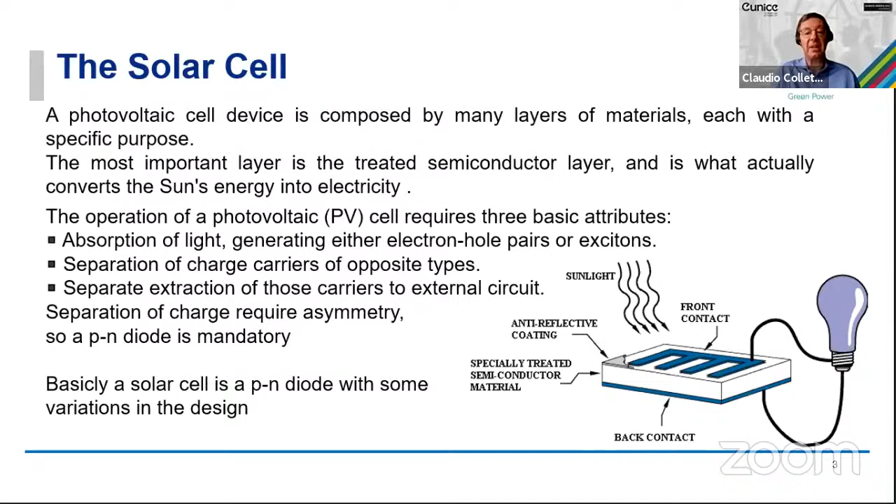Basically, a solar cell is a diode, a PN diode, with some special design that allows us to perform this kind of extraction. We have different kinds of solar cells.

The most diffused in the world is the monocrystalline one, in which the main base is a crystalline silicon wafer that functions as an electrical generator, and which we process, adding some coating and passivation layers that act in the phase to extract these charges.

There are many other kinds of solar cells, as you can see in this picture, such as some thin film, which could be a silicon-based amorphous film, or other different kinds of films like CIGS, in which we can have different materials than silicon, such as complexes of indium, gallium, selenide, cadmium, tellurides, and so on.

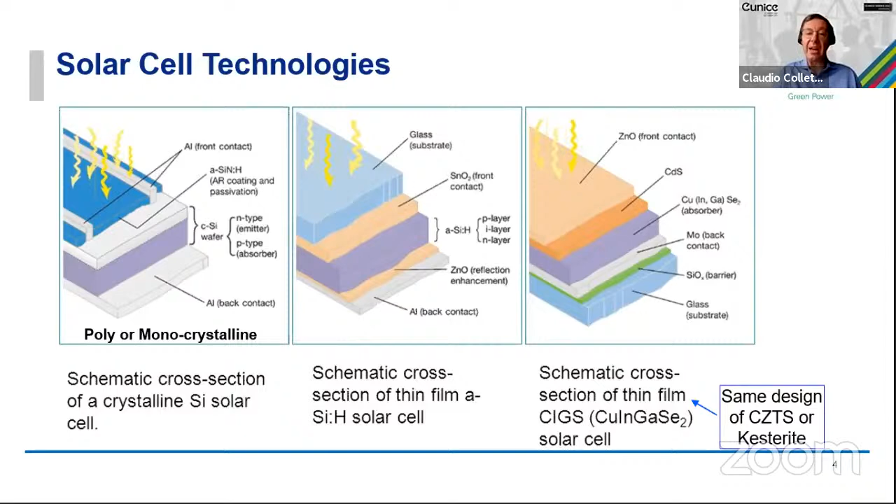A new emerging solar cell technology is called heterojunction technology, in which we are combining two different generators of electricity: the crystalline silicon with the amorphous silicon. And in this way, we are able to absorb much more light from the sun that comes onto the solar cell itself, because with this technology we have maximum extraction of the red part of the sunlight and the blue part of the sunlight.

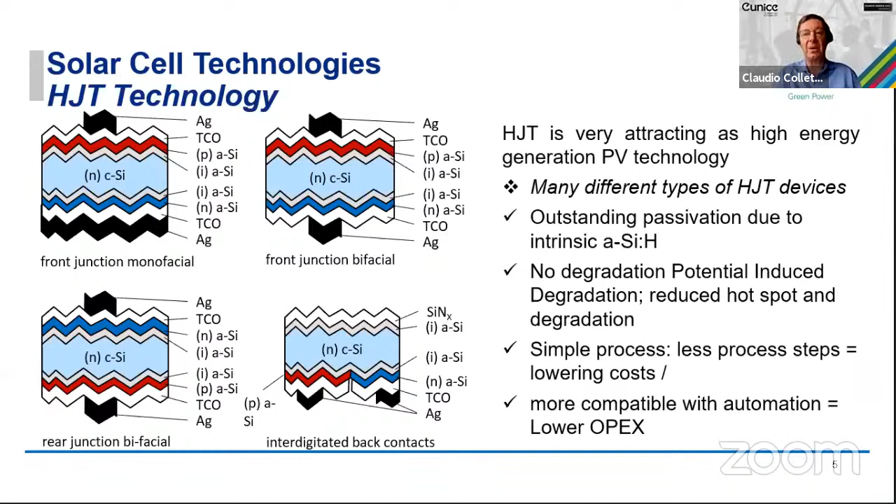This kind of technology is the main focus for EGP, and is the base of what we have in Catania as a manufacturing fab.

Why have we chosen this kind of technology? Not only for the higher efficiency that allows us today to go into production with efficiency over 23%, which is higher with respect to the standard manufacturing technologies present in the photovoltaic world today, but it's also a simpler technology that requires fewer steps of production. So we can combine a higher efficiency with a simpler process.

And this is obviously good for a manufacturing site like the one in EGP.

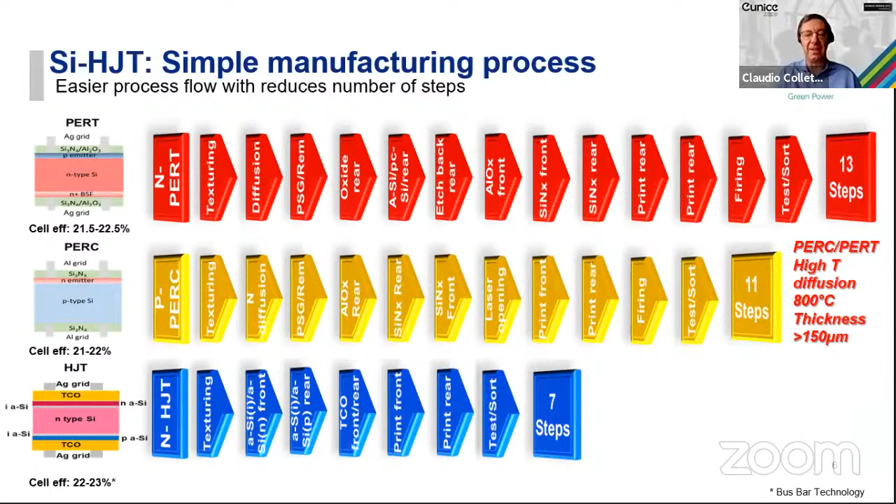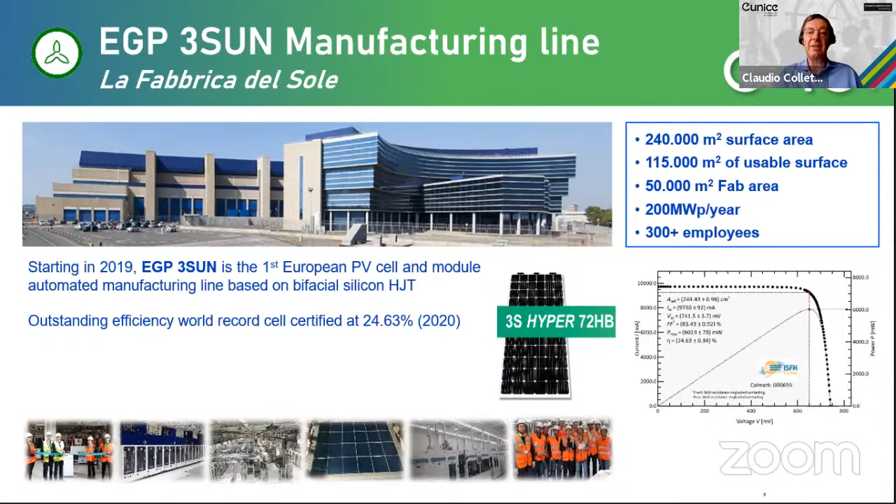3SUN was started as a production site for thin film photovoltaics, but in 2019 was fully converted to be the first European PV cell and module manufacturing site using heterojunction technology, and has obtained very outstanding results in 2020, when we had the possibility to certify our technology with an external lab, reaching the outstanding result of 24.6% efficiency.

What we are doing in EGP 3SUN is developing the technology of silicon heterojunction, and developing research and innovation activities on all the layers you can see in the picture of the silicon heterojunction. So new experiments on materials and processes, and process development on the amorphous deposition, on the layer of the transparent oxide contacts, on the metallization, and so on.

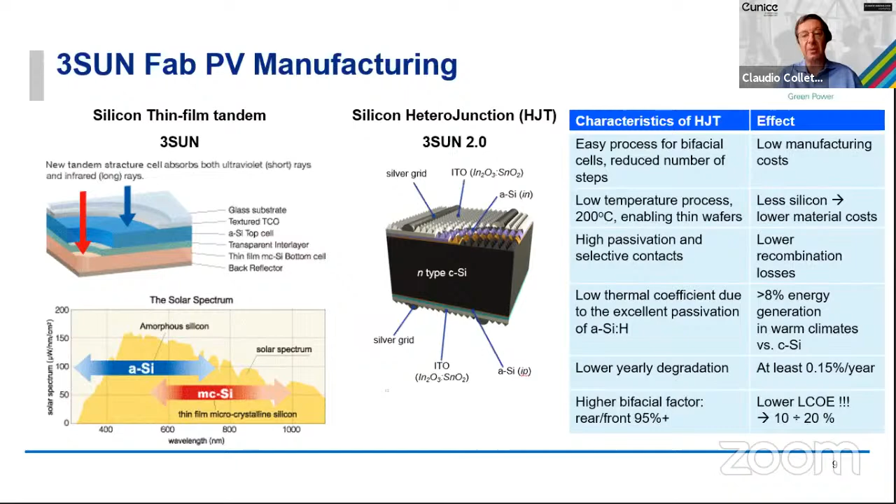I would like to spend 5 minutes now to show the audience the possible research and collaboration fields we can have in 3SUN. This is a very short sketch of the production process of the cell. You can see we have many processes that I will show in more detail in the next slides.

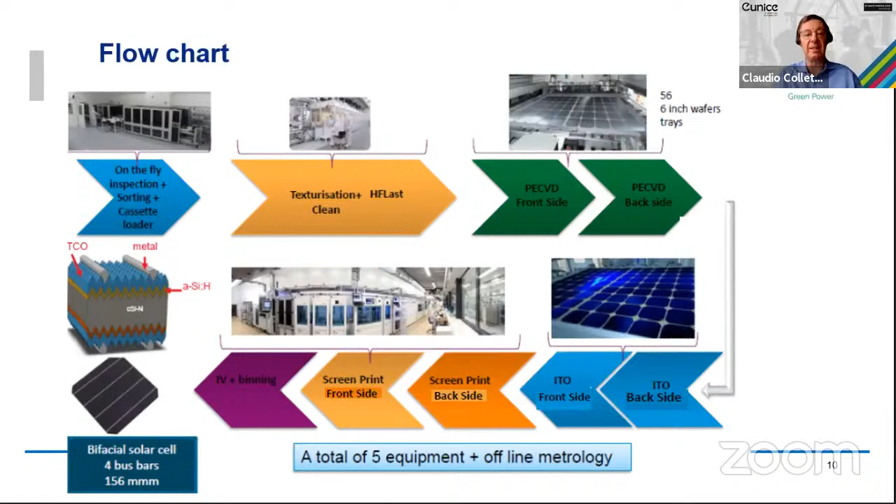The first big process we use in cell manufacturing is a wet etching process, with two phases. One is an alkaline etch used to smooth the surface and reduce defects of the wafer. The wafer, as I said before, is a crystalline silicon N-type doped wafer, in which we are also producing some texturization using this alkaline wet etching, to produce small pyramids on both surfaces of the wafer.

Why do I mention both sides? Because our technology is a native bifacial technology, allowing us to extract energy both from the light coming on the front of the cell, the one exposed to the sun, but also from the back, which captures reflection or diffused light coming on the back of the module itself. We have some innovation activities on these steps, and also on the second part, which mostly uses the acid wet etching process to clean and avoid oxide formation on the surfaces of the wafer.

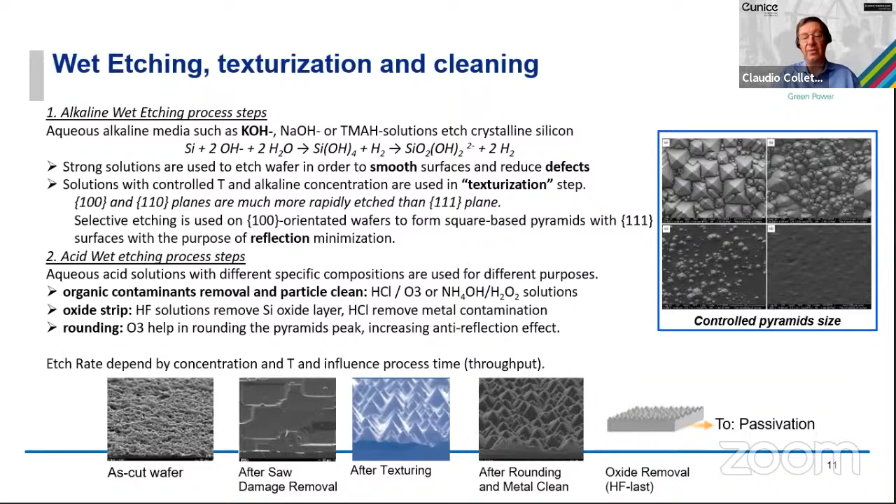A second very important process step is the deposition through plasma-enhanced chemical vapor deposition of the amorphous layer on top of the crystalline silicon wafer. In this case, it's very important to have a very clean process that allows us to passivate the substrates of crystalline silicon with amorphous, intrinsic, and doped layers, very thin layers.

There are still very good possibilities to improve all these processes in manufacturing, so big efforts in this period are pointed toward developing this process. This process is important both because it allows us to passivate the surface of the wafer, avoiding the transfer of contamination to the silicon wafer, and also to create the junction between the crystalline silicon that allows us to extract the carriers, and so the electricity.

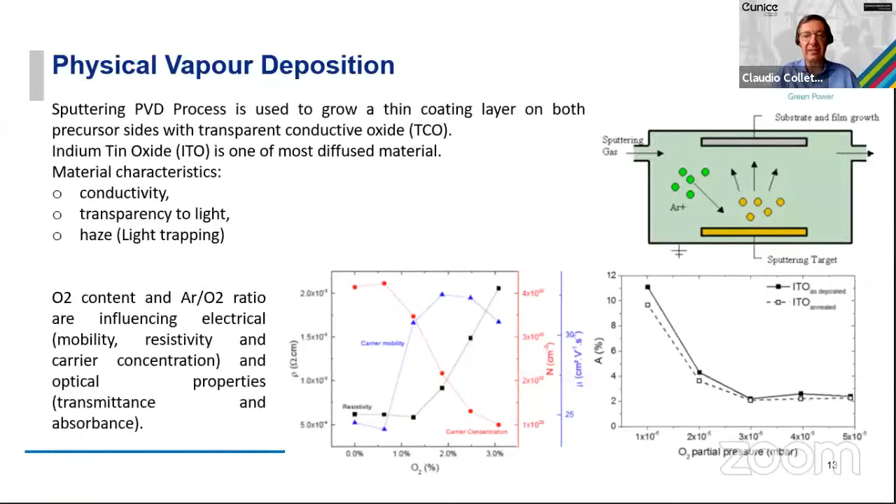The following big process step is the deposition of the transparent conductive oxide. We use some sputtering, so physical vapor deposition processes. The importance of this layer is that it allows distribution of all the carriers, the charge extracted from the junction created with the amorphous deposition on the crystalline wafer, while allowing the light coming on the cell to pass through it and reach the silicon. So we create a layer that should be both optically and electrically conductive, and this is a tough process to perform.

The last big process is the metallization one. In this case, we are printing silver patterns on the surfaces of the cell precursor, allowing us to connect external circuits to the cell, extracting the energy and transporting it externally to the cell and then to the module.

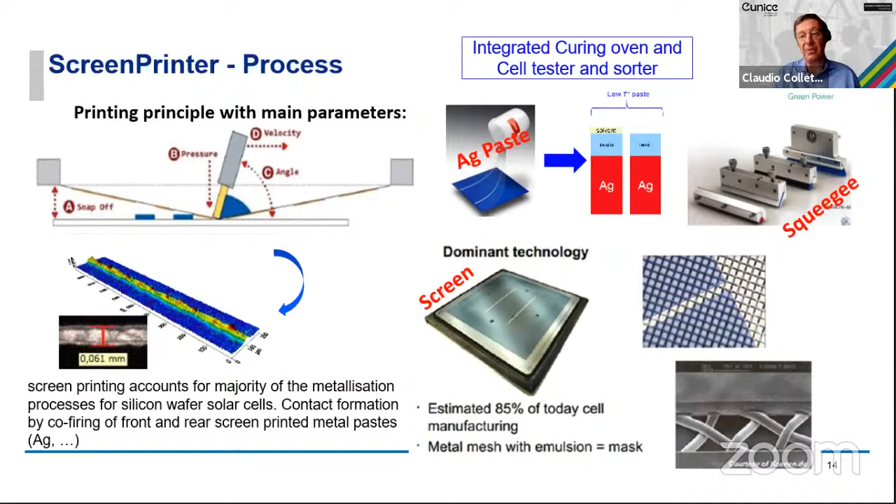These are a very quick sketch of what we are performing as manufacturing processes in the 3Sun fab. This allows our audience to evaluate if there's interest in performing an internship in the manufacturing environment, or in the research environment for development of this technology.

But EGP in Catania is not only offering this kind of possibility. We also have this lab and hub located very near to 3Sun, 1 kilometer from the 3Sun manufacturing fab. That site performs the activities of characterizing the solar technologies.

We have instruments allowing us to simulate sunlight and have standard conditions to measure and compare all the photovoltaic technologies, but also in outdoor conditions.

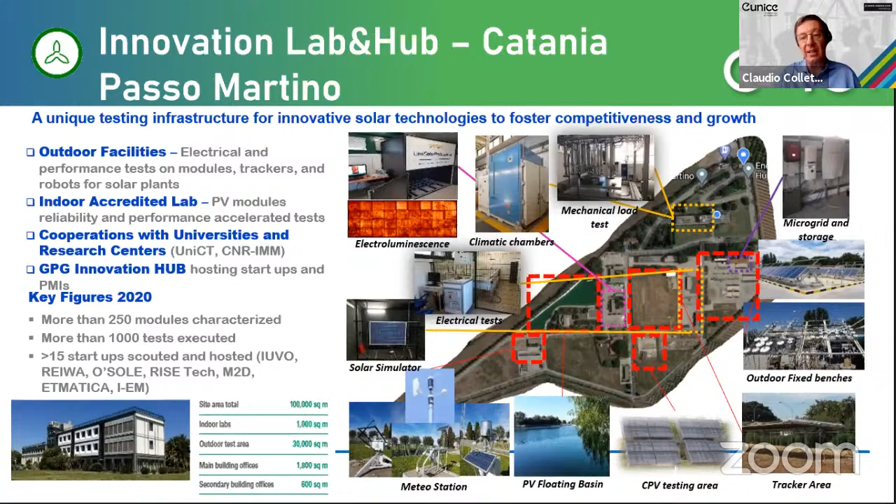In this case, we have some small plants directly exposed to the environment, to the sun, to evaluate the real efficiency and reliability in weather conditions.

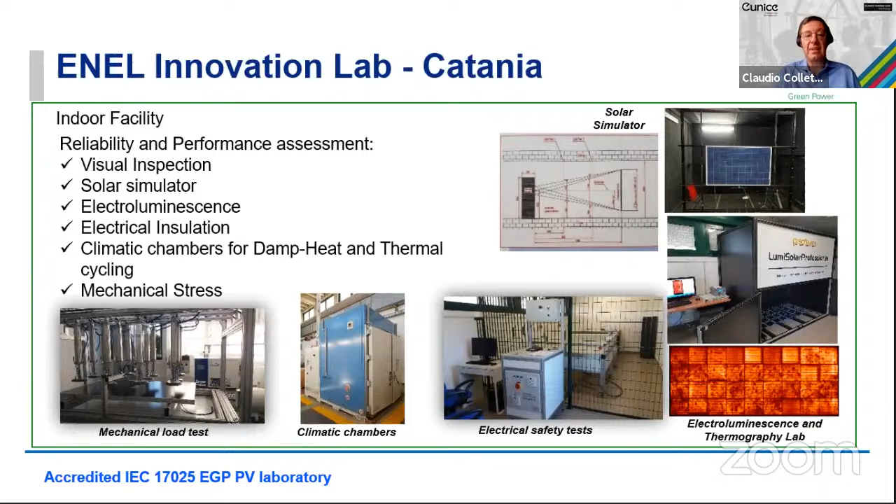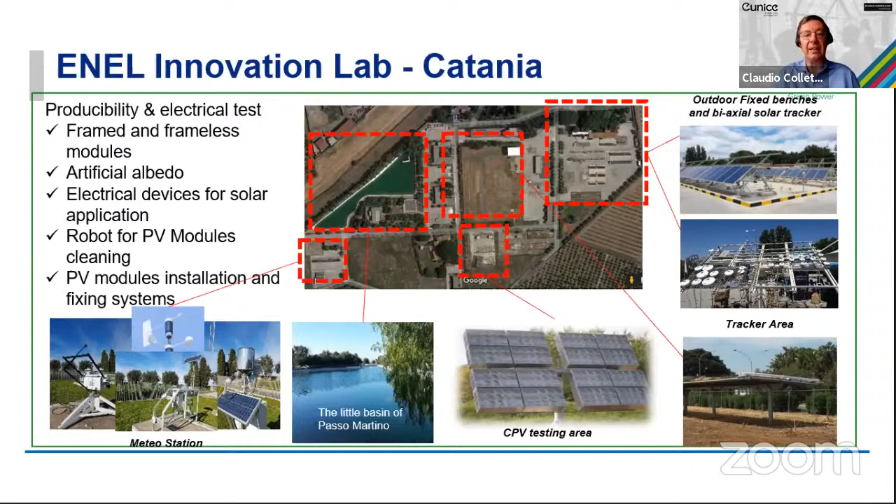So you have the possibility to cooperate in the development of measurement protocols, standard protocols, and to develop a new kind of standard that allows us to evaluate and simulate, and also demonstrate that simulators work using real weather conditions and not simulated ones in the labs.

So that's the whole scheme of what we are doing in EGP with focus on the Catania activities. If there are any questions, I'm available. We have some minutes, I think.

Thank you, Claudio Colletti, for this very comprehensive talk about solar cells. As I'm a physicist, I'm very interested in this, and some of it was very familiar to me. Maybe not everyone in our audience was so familiar with this solar cell production, so it was quite interesting.

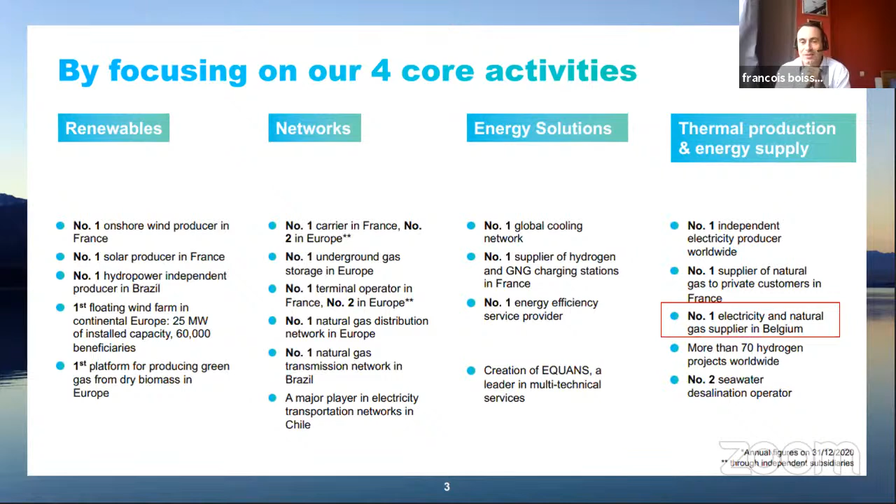If you move to the next slide, Jean-Pierre. So we are well known in Belgium, but we are definitely an international player. If you look at last year, we have about 170,000 employees. It's very easy for Belgium - it's 17,000, so 10% of ENGIE's employees worldwide are based in Belgium. So you see that Belgium is definitely a big country for ENGIE.

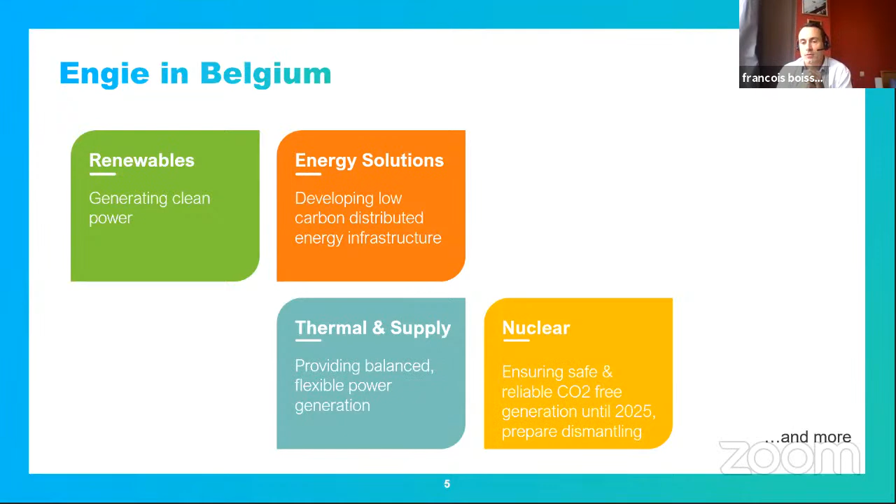ENGIE is way more than that - we also have other activities, and some people may have heard of Tractebel Engineering. We have R&D, which Jean-Pierre will mention. We also have a global portfolio management and trading activity that covers all those solutions. But I will stop here, and give the floor to Jean-Pierre, who can dig into some specific elements of Laborelec in terms of R&D.

Thank you, François. Yes, we thought it would be interesting to present also the R&D side of the ENGIE group in a couple of slides. So I will make it very short, Patrick, don't worry.

Yeah, that's unfortunately also my task. We only have 5 minutes. Yeah, I know. So well, it's just a couple of slides.

ENGIE Laborelec is one of the two main R&D centers of the ENGIE group, and it is very much focused, for historical reasons, on the electrical power value chain. We have a global presence. Laborelec is a company on its own, an affiliate entity within the ENGIE group, with a main office in Brussels and branch offices in France, Netherlands, Germany, Chile, and the Middle East.

What is characteristic for Laborelec is that, as an R&D and competence center within a large group, we have a quite highly skilled workforce. We have quite a lot of PhD engineers and specialized technicians, which is excellent for the relationship with universities and so on.

We do three types of activities. We do R&D projects, but we also do servicing and consultancy with the specialized expertise we have, which we sell as a service for customers. A large part of our customers lies within the ENGIE group, but we also serve expertise to customers outside of the ENGIE group. Beside that, we have also some development, where we can sell some products, physical or software products.

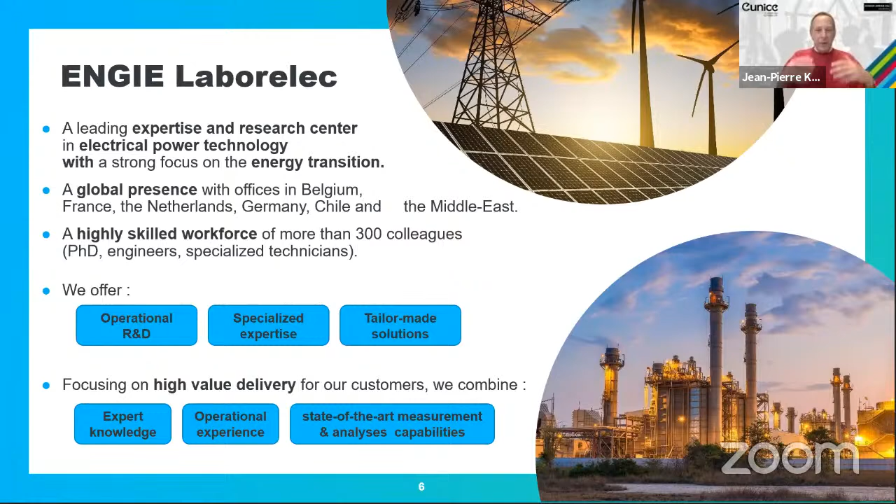So this is the list of competencies that we manage. I will not go through this because it's a non-exhaustive list of all the domains we manage, but just remember that it covers the complete value chain of electrical power technology. You will find stuff like water, biology, materials technology, Internet of Things. This sort of stuff is heavily developed at Laborelec.

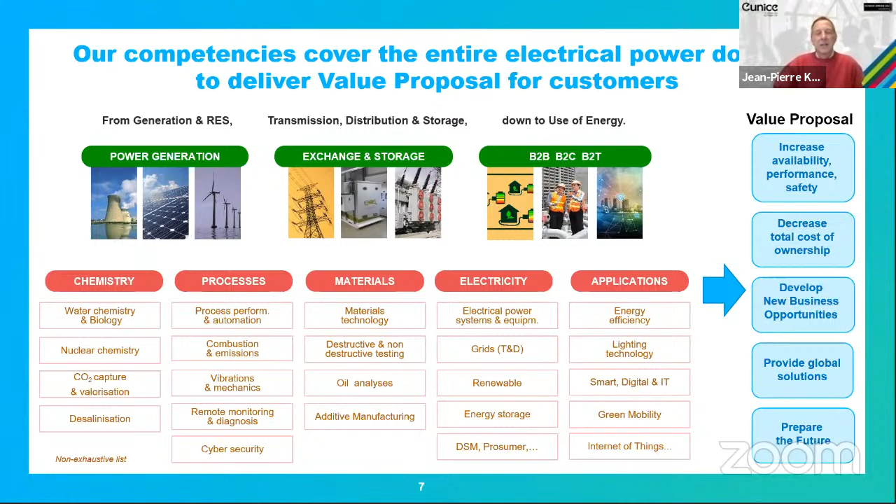And these are the six main domains, and this is my last slide, in which we focus our R&D activities today. You will recognize that all these topics are strongly focused on the energy transition.

To conclude, I would like to say something about what type of people we'd like to recruit. We like to recruit people who have this sense of multidisciplinarity, people who like to have a certain level of skill and expertise. We also like to recruit people with a project-oriented mindset, knowing what the start and end of a project is, what the budget is, what the result is. These are really things we like to have, and people who are able to deal with uncertainties and manage them.

And finally, and that will be my last words, people who are genuinely convinced by the energy transition necessity.

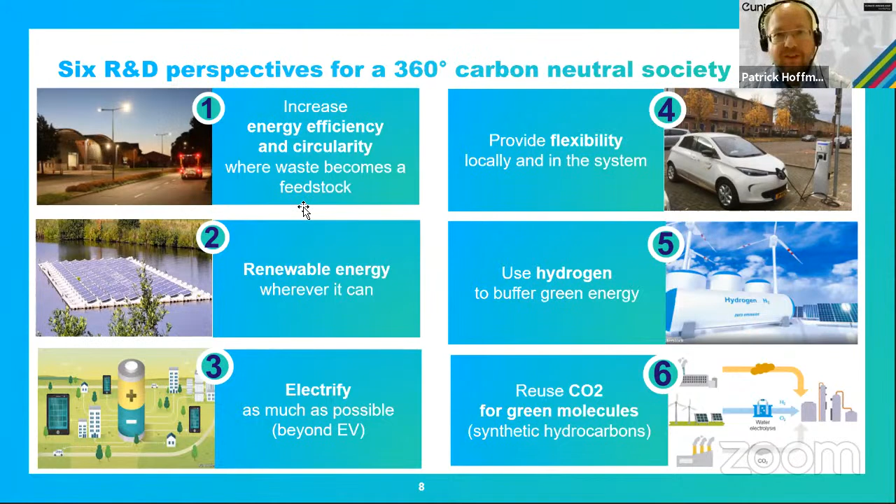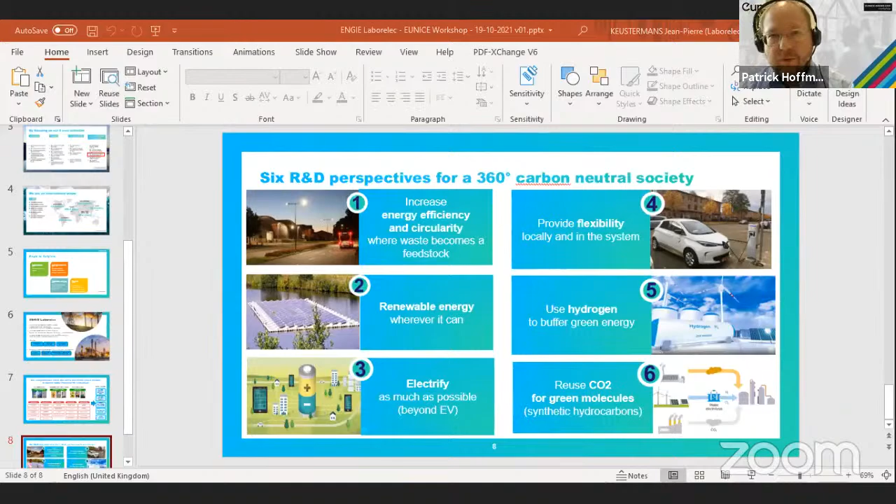Yeah, so as I understood it, Laborelec is the research and development unit of ENGIE. Can one say so? Huh? It is so, yeah, it's one of the two main R&D centers of the ENGIE group. Oh, okay, so that is somehow the natural contact point for us universities to your company, so it's quite right that we have you here presenting all this.

And what's interesting is that there is a sort of porosity between the ENGIE group and Laborelec or the other research centers. People often start a career somewhere and diffuse into the other entities, so it is a very natural thing.

I mean, that is an experiment, it's not a new experiment, what we are starting with EUNICE, so cooperation with companies, not only national but also international. That is a little bit tricky. It's easier for great companies who are anyhow internationally oriented, but we also had today some very small startups founded in 2018. So that is more an experiment, and we were also somehow interested in how it works with these companies. I think that is a special point in EUNICE.

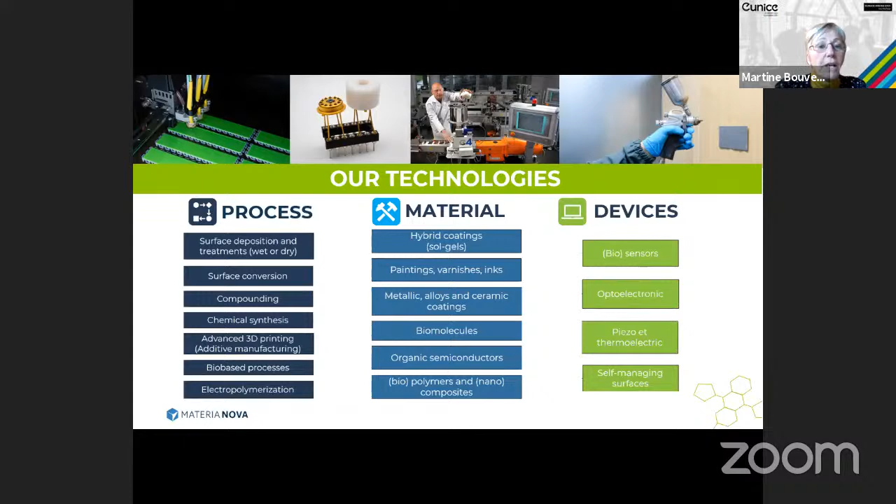In terms of technology, we have 3 major technologies: process, material, and device. At the very early stage, Materia Nova concentrated on materials, but we found out that if we want really to transfer the innovation into the industrial world, we also need to develop deep knowledge in processes, because of course you need to process, coat or transform material. And then also in a third place, the device. We support industrials in tailor-made products, engineering and industrialization.

We also manage and develop projects, because a large part of our finance comes from project calls, and so we are very used to creating consortiums and filling in calls. We have a unit doing life cycle thinking, and also a platform for analysis and characterization, which is really a support to industrials, because thanks to our equipment, they can call on us and on our expertise to do analysis and characterization that they cannot do inside their company, because for example the equipment is very expensive.

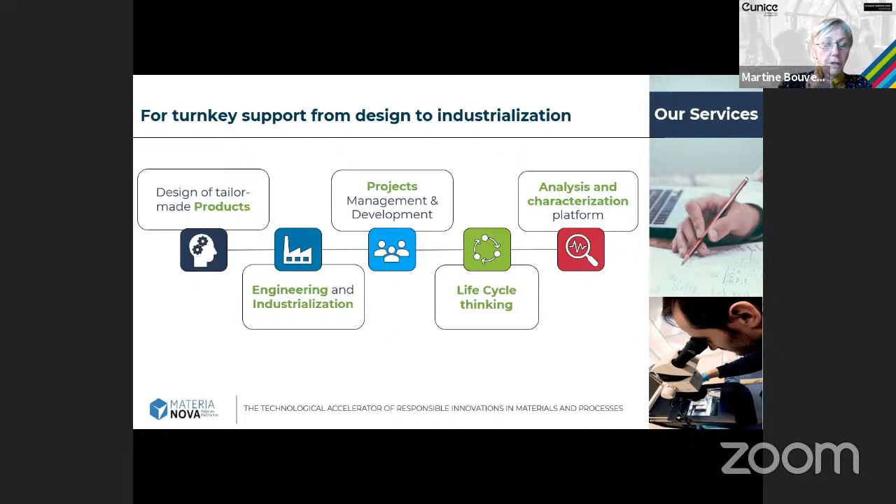Now to concentrate on energy, because it's the subject of this exchange, we also aim to accelerate the energy transition. In fact, we are not only active in energy, we are also very active in environment, healthcare, and transport. In energy we are particularly active in energy control and efficiency, transport and storage, capturing and conversion, as well as production. Now I'm just going to concentrate on 3 major topics on which Materia Nova plays a key role in developing innovation to speed up this energy transition.

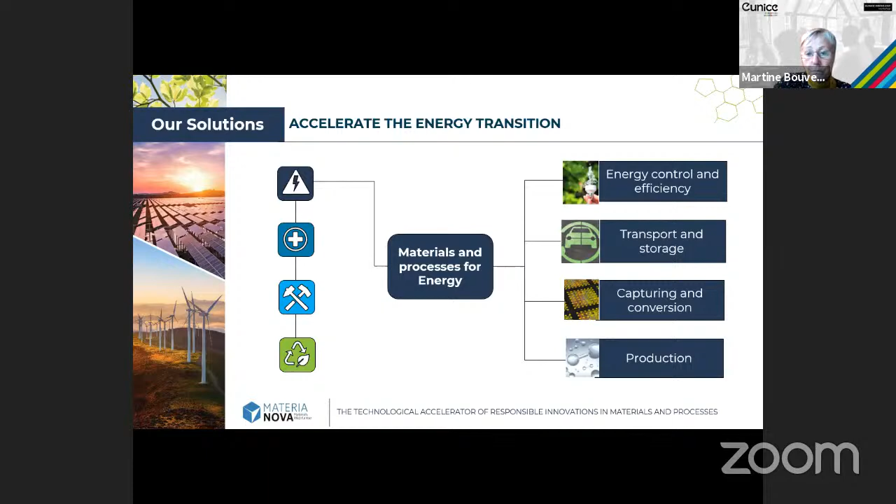So first example, or a theme on which we have put innovation, is hydrogen production. Hydrogen can be used as a raw material, fuel or carrier, and as an energy storage solution. Actually, almost 96% of the world's hydrogen production is produced in a very economical way by steam methane reforming, but this is very polluting. With the rise of renewable electricity production, electrolysis is one of the most prominent technologies of the moment. However, these technologies still face a few challenges, the main one being their economic viability.

Materia Nova has developed the hybrid plasmalysis technology, or plasma pyrolysis, that consists in splitting the methane molecule into its components, hydrogen and solid carbon. This innovative technology permits using less energy if it is fed by green electricity. It has no CO2 emission, and thanks to the splitting of the methane into hydrogen and carbon, the carbon can be valorized, permitting then to decrease the cost of production and the net price of hydrogen. It also permits creating new economic sectors by having local hydrogen production and then generating activity also locally.

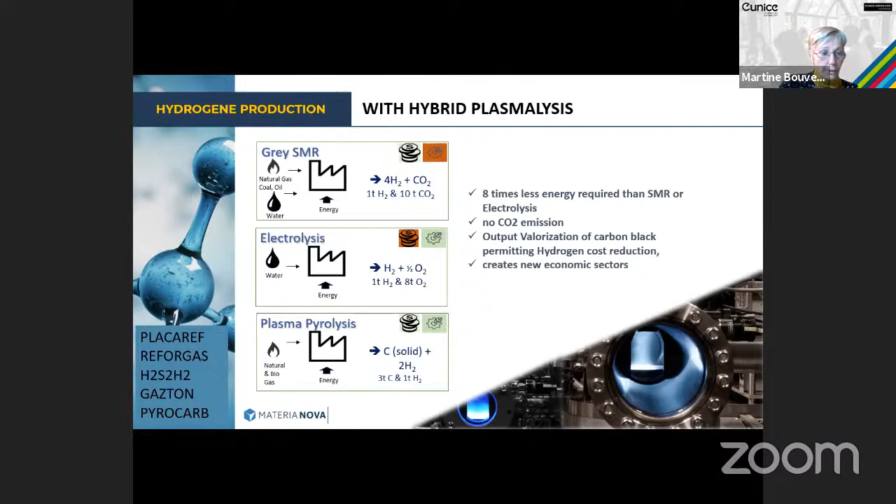A second example of activity is the conversion in synthons or e-fuels. In terms of reducing greenhouse gases, the capture and recovery of CO2 is one of the most active areas of research. Materia Nova developed plasma technology and chemical catalysis. The fundamental idea is to activate CO2 by plasma in an energetically efficient way in order to recover it in the form of synthons for the chemical industry, as building blocks for synthesis of materials, thereby reducing the dependence on fossil resources.

Materia Nova also proposed a process to complete the biogas process. Biogas generated from waste can be converted into high added value molecules such as acetylene and ethylene at a lower energy cost. The acetylene and ethylene are then transformed into polymers used in the manufacture of various objects.

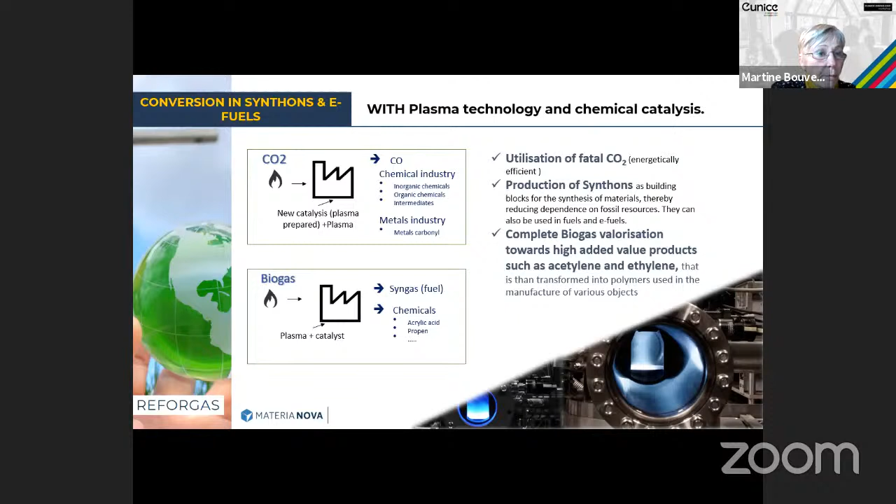The third example I wanted to speak about is energy performance. Materia Nova is active on various regional or European projects for energy performance, mainly in transportation, with the development of hydrophobic or omniphobic sol gel paints and plasma surface treatment that permits improving flow with direct impact on fuel consumption, avoiding tiny disturbances in the surface airflow, so there's no insect or fouling buildup if it's a boat, avoiding disturbance. This treatment can also serve as anti-corrosion protection.

The non-stick properties are generally related to the wetting or sliding property of the surface. We can play on the roughness of the structure, the topography, as well as the surface chemistry, in order to generate these properties.